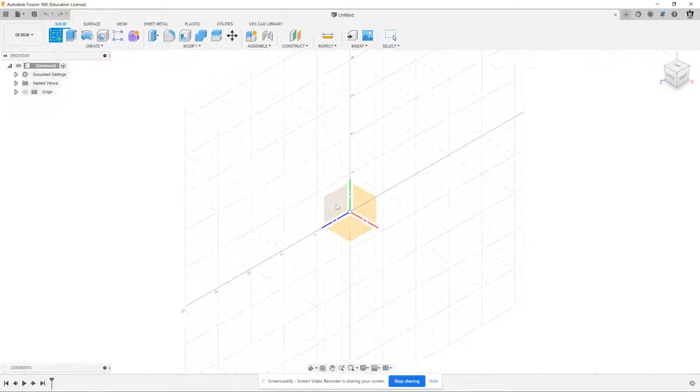So first thing we want to do is make this straight piece. We'll go into Fusion and create a sketch here, XY plane, the usual plane. Inside, just like the previous one, the inside circle is 0.875 diameter. Then C for circle, outside is 1.125. Cool, and then we can finish our sketch.

So this is at the origin, right? Now it's going to be easier if we keep things located at the origin. So what we're going to do is extrude this 2.5. You can see that right there. We want to make it extrude both ways so the center stays at the origin, which will help with our next extrude. So anyways, we got to extrude 2.5 but keep it centered.

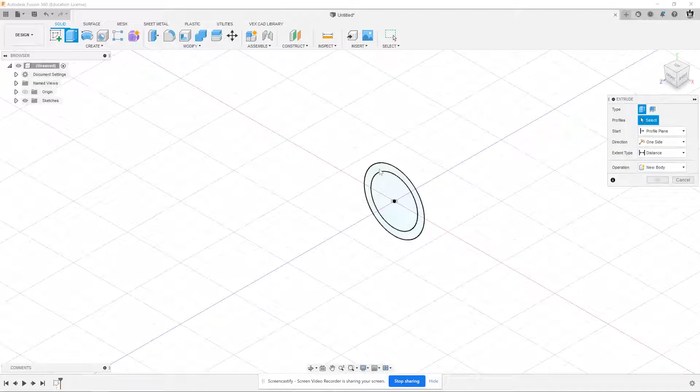So you click extrude and you click the profile. We're going to click in between the circles. Normally we do a one-sided extrusion, so if I type 2.5 it's going to go one way. But we want to be centered, so you can make it two-sided. That would let you create two sides that are uneven. We want symmetric, so it'll go both ways.

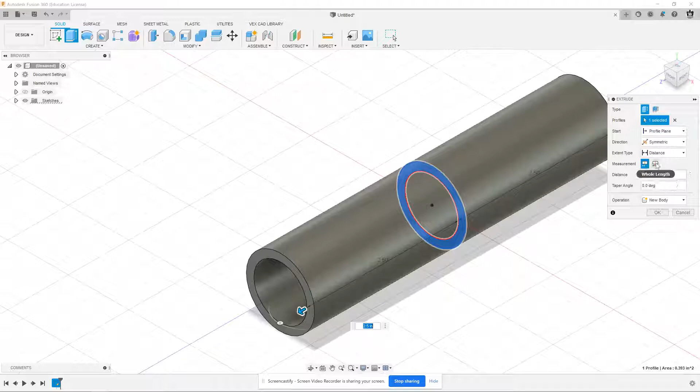Once you have it on symmetric, there's a measurement thing here. You can go half length, meaning 2.5 is half the length, or whole length, and that's what we want - we want the whole length to be 2.5. So click that one, then click OK. So now we have the basic tube.

What we want to do next is the top part of the T. If you measure from the center of the tube we just made, it's 1.125 inches straight up. And then you can see it's 1.25 inches inwards, which is half of the length of the tube we made. So we just want to make that.

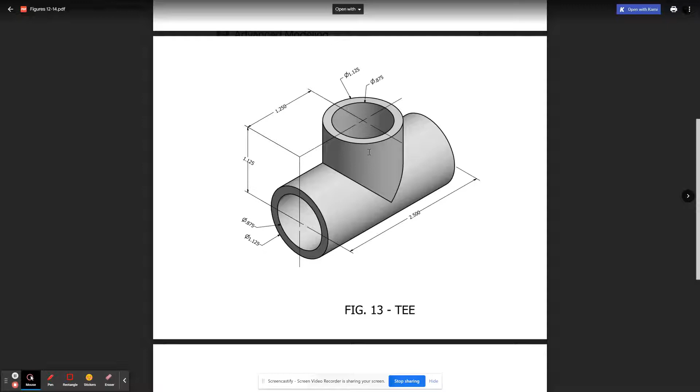Easiest way to do this is to construct a plane, so we're going to use this tool right here. The basic one is called offset plane. That'll let you take any plane that exists in your part and create a plane that's parallel to it, but at a certain distance away. So I click offset plane right there.

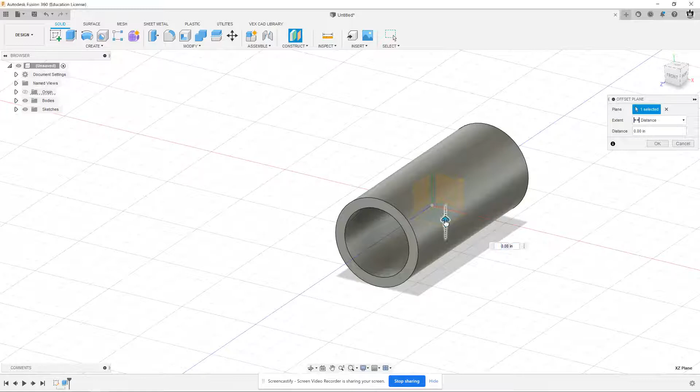You can see it shows me the part, and the origin planes that we use. We're going to use this origin plane right here, which is the XZ plane. I click that, and then there's an arrow, so you can make your new plane below or above. We're going to go above, and the distance we're going to use is 1.125 inches. So I type 1.125 and hit enter.

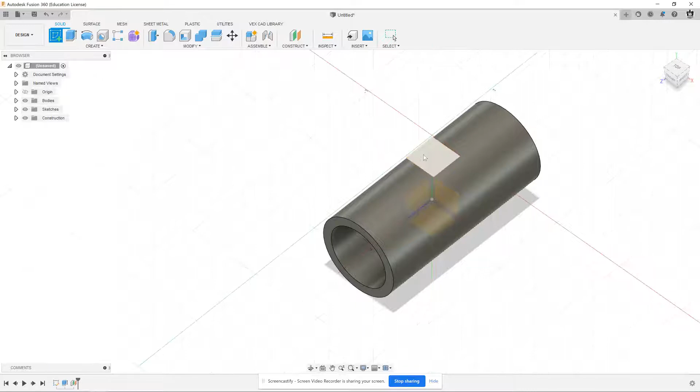And then there's a new plane. What the plane does is give you a place to sketch. So we're able to sketch on a place that is not actually on the surface of the part, which is really powerful. So I do create sketch, click on this plane. Boom, and you can see it shows me the origin and everything. Then I'm just going to draw my two circles at the origin, 0.875.

Now we're going to draw our second circle. C for circle, click on the center, move your mouse out, and then type 1.125. I did a little typo there, and hit enter. And then there's that, okay.

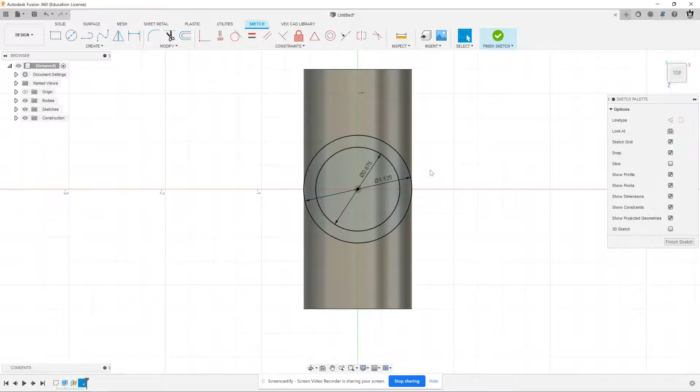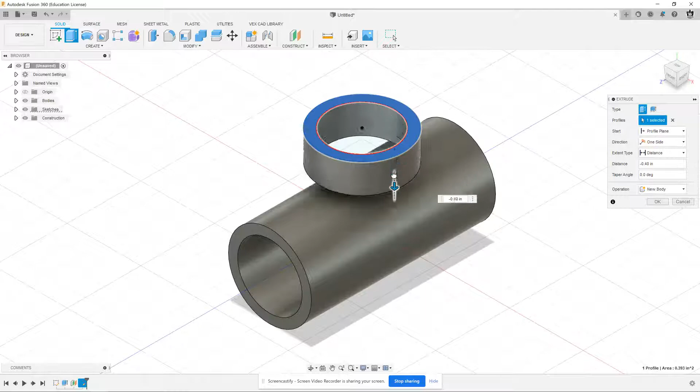So now for our last trick, we're going to finish the sketch, go home, and then extrude this down. So we're going to do an extrude, click right here. Boom, we're going to tell it to go downwards. Now it's going to extrude downwards, but it doesn't really know how far to go.

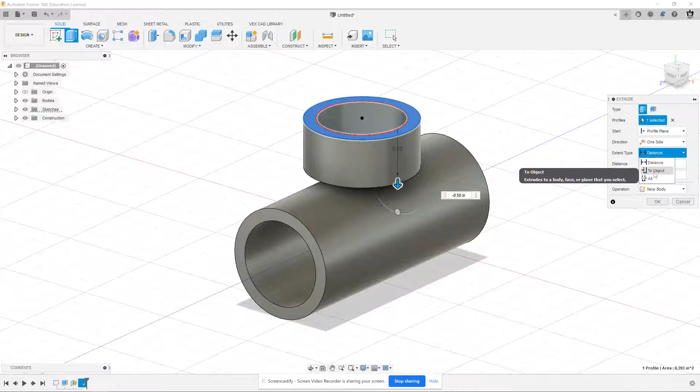Do you get me? You could probably try to figure out the exact distance to go down, but then you can see it starts to cut - it gets weird. So what we have to do is make sure it's going downwards, and then use a tool here - instead of extent type being distance, we're going to say to object. Then we click on this cylinder and it'll extrude all the way down until it hits that cylinder. Also notice the operation here - you could cause it to cut or make a new body, but it's actually going to join, so this will be the same component.

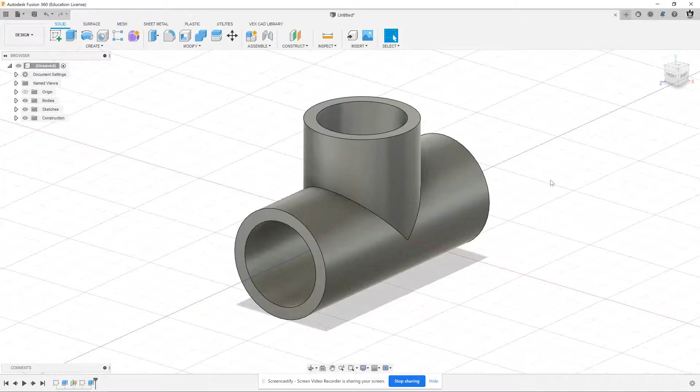So you click OK and it puts that tube in the top. Then we got to check the top. You can see we got a slight problem here, right - it didn't cut a hole in there. So we got to cut a hole in there.

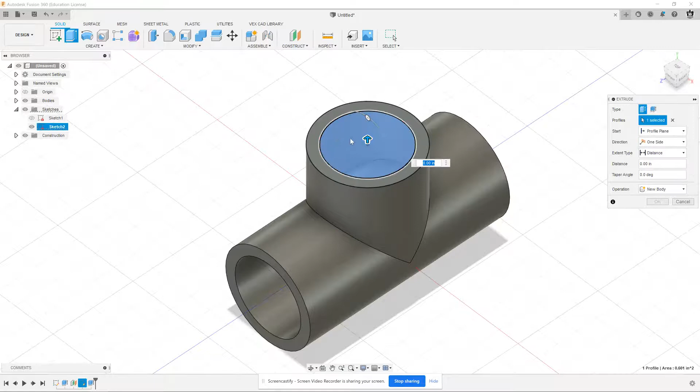Easiest way to do that, we already have a sketch for the hole that we need. So we just go to sketches up here, top left, turn on sketch 2. Then we're going to do another extrude - extrude this center circle downwards. We're going to make it a cut operation, and change the distance to object. What I want to do is click the inside of the pipe, down here.

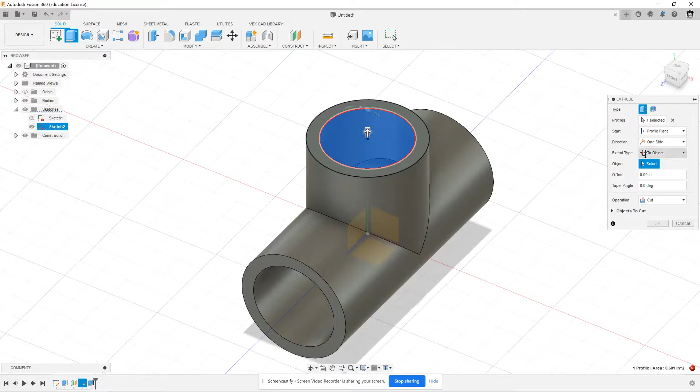So again, it's an extrude, cut to object. Click the inside of the pipe, hit OK, and you can see it cut out the top. It's kind of hard to see, but if you look inside, you can see that it cut through. All right, so that's how you make yourself a PVC pipe T.

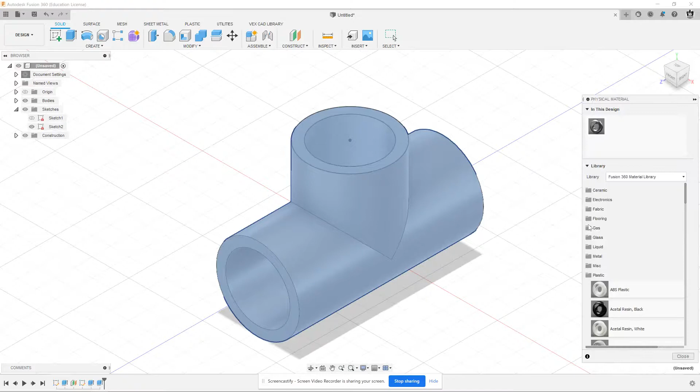Go ahead and put the material on it, same material as before, PVC piping. Although, you guys, if you want to have fun with these, go for it, but I like that because that's the real material. Save this bad boy, figure 13, hit save, and you are done. Good luck, have fun.